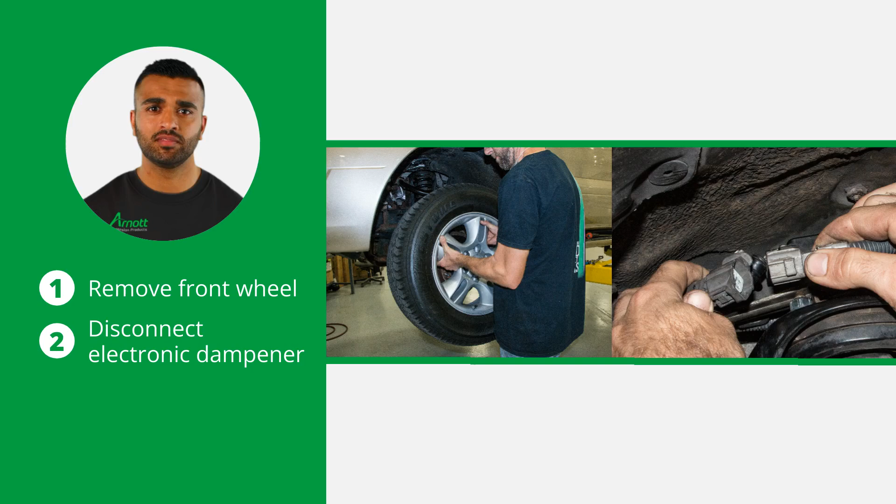Remove the front wheel and locate and disconnect the electronic dampener. Next, remove the sensor and the bracket from the top of the strut.

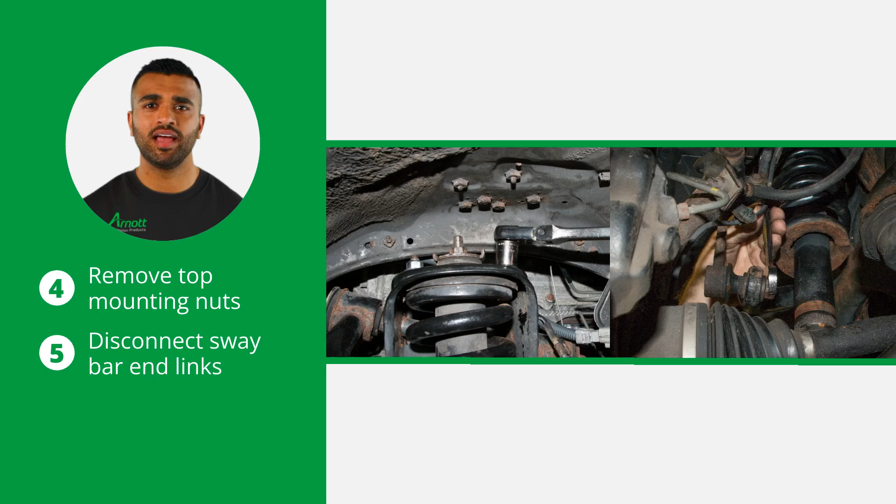Now remove the 3 top mounting nuts and disconnect the sway bar end links from both sides of the vehicle. Continue by removing the brake line bracket from the spindle assembly on both sides of the vehicle.

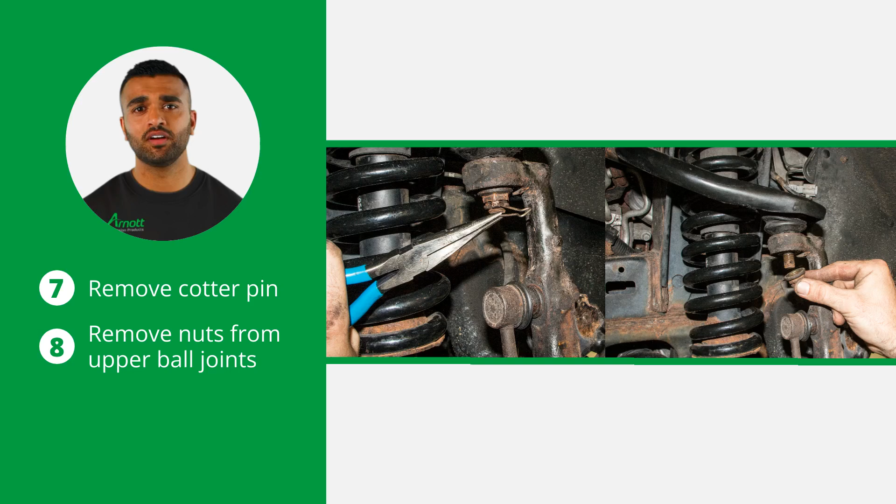Now remove the cotter pin from the castle nuts and remove the nuts from the upper ball joints. Use a ball joint remover tool to loosen and remove the ball joints on both sides.

Then remove the bottom mounting nuts and bolt. Now rotate the sway bar up and pull the spindle down to remove the strut assembly.

Use a spring compressor tool for the following removal steps and refer to the spring compressor instructions for proper procedures and safety hazards. Now remove the top nut, the washer, the upper mount, and the coil spring from the OE assembly. The upper mount and the coil spring will be reused on the new assembly.

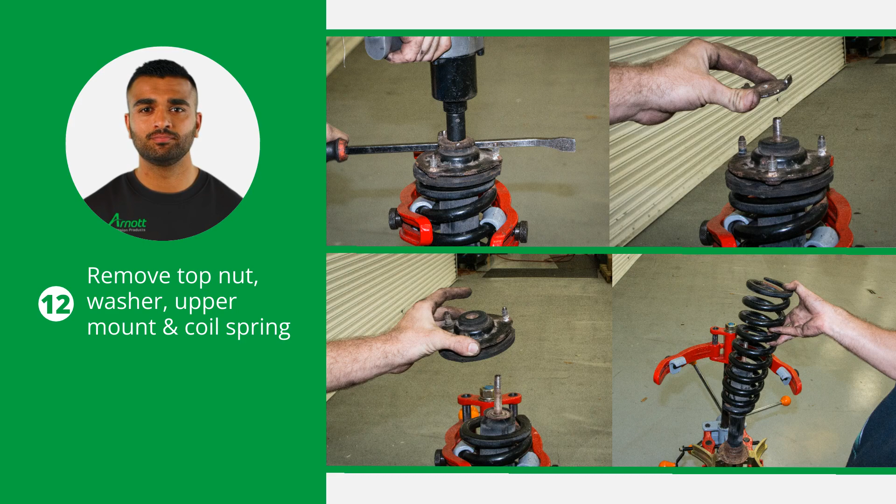Next, install the new shock into the spring compressor. Then remove the top nuts and upper washer from the new shock.

Now it's time to install the OE spring onto the new shock, making sure that the spring keys into the lower spring perch as shown.

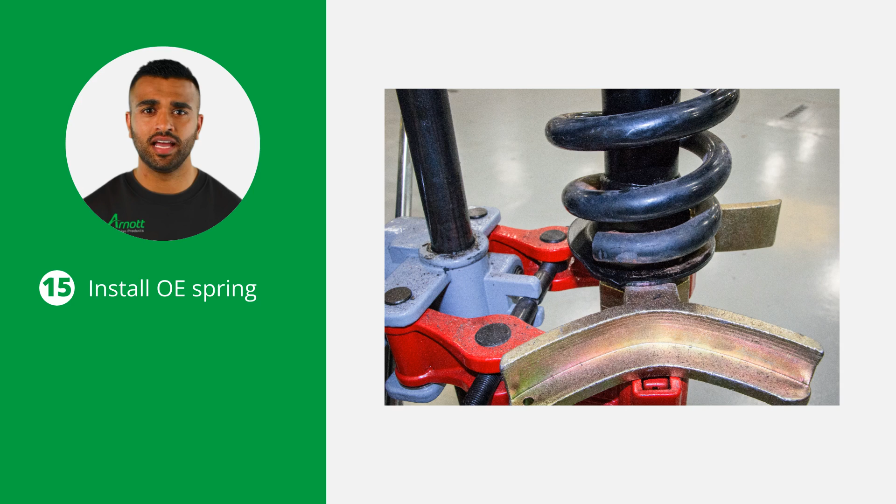Then compress the spring and install the top mount, upper washer with the flat side facing up, and the top nut. Carefully release spring pressure from the new strut assembly.

Install the new shock onto the vehicle in the reverse order of removal. Leave the electronic damper plug disconnected and tie it back away from moving parts and excessive heat.

Thanks for following our guide on installing a new Arnott shock for your Lexus or Toyota. A proper installation is key to maximizing the performance and longevity of your suspension system.